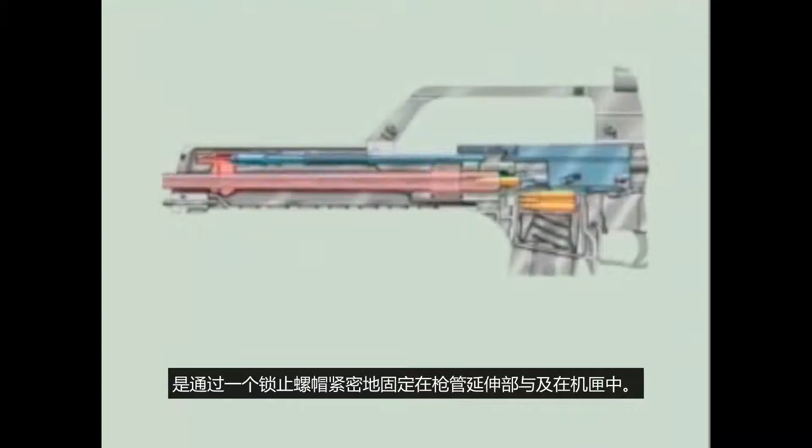The G36 rifle is an automatic weapon for firing semi-automatic or burst fire. The G36 has a gas-operated system with a rotary bolt head. The hammer-forged and hard chrome-plated barrel is firmly locked to the barrel extension and to the receiver by a locking nut.

Receiver, pistol grip, foldable buttstock and handguard are made of fiber-reinforced polymer. The magazine with its transparent receiver holds maximum 30 cartridges. The optical sight is integrated into the carrying handle.

The G36 is available in two versions, the G36E and the G36KE. The G36KE is provided with a shorter barrel and a shorter handguard. Handling, cleaning, disassembly and assembly are identical for both versions.

The cocking handle serves for loading the G36. It is used for moving the bolt in the receiver. The cocking handle permits operation by both left and right-handed shooters. The cocking handle can be swiveled outward and locked in position to be used as a forward assist. During firing, the cocking handle is parallel to the bolt and it moves with the bolt.

The bolt catch holds the bolt open after the last round has been fired from the magazine. When the magazine is removed, the bolt can also be manually held open by pulling it all the way to the rear and by pushing the bolt catch at the front of the trigger guard manually upward whilst releasing the bolt.

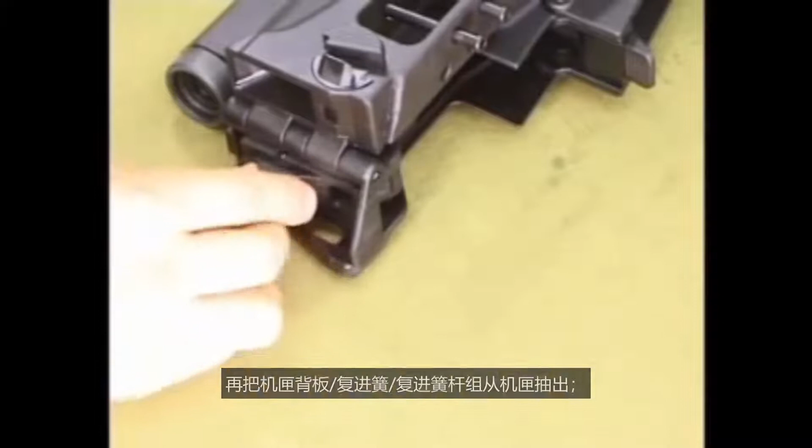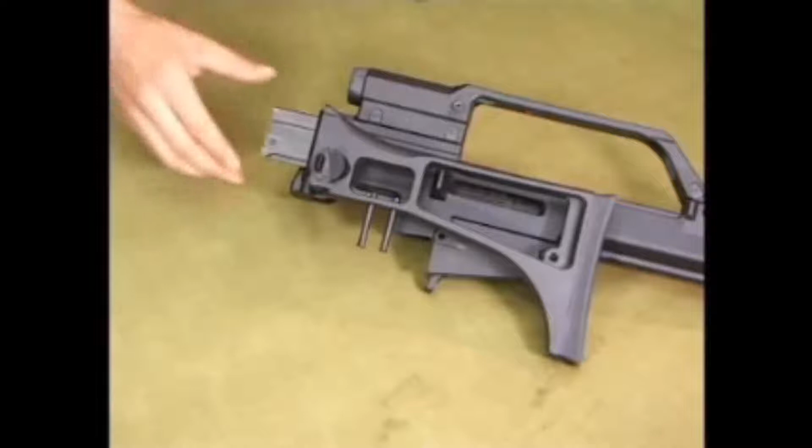For further disassembly, fold buttstock to the receiver. Push the backplate to the bottom and remove backplate and recoil spring guide rod with recoil spring. Remove the bolt. Press the magazine catch and remove the magazine guide to the bottom.

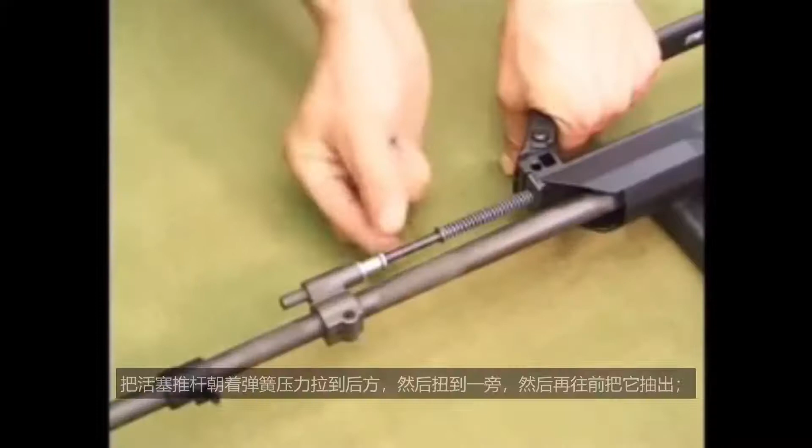Pull locking pin out of the handguard and insert it into the buttstock. Remove handguard to the front. Pull the push rod against spring pressure to the rear, pivot it aside and remove to the front. Remove the gas piston.

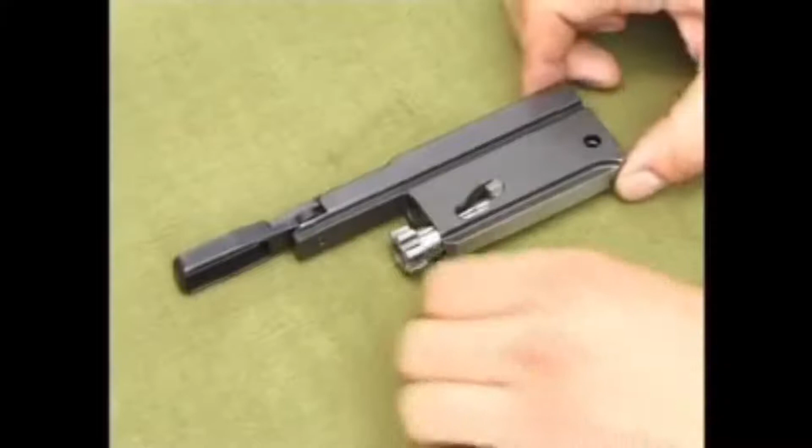Push out the safety pin in the bolt head carrier and remove the firing pin to the rear. Remove the control bolt to the side and take out the bolt head to the front.

For cleaning and care of the G36, use the pertaining cleaning kit. Competent carrying out of the cleaning and care operations ensures constant readiness to fire, prevents premature wear and tear, avoids accidents, and saves maintenance expenses and time.

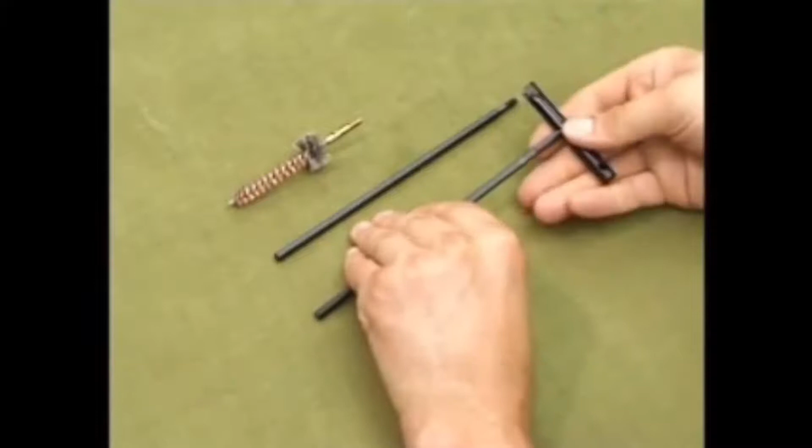For cleaning of the chamber, screw the chamber cleaning brush onto the cleaning rod. Clean the chamber of powder residues with a chamber cleaning brush soaked in oil.

Screw the barrel cleaning brush onto the completely assembled cleaning rod. Pull the barrel cleaning brush soaked in oil through the barrel. Cleaning is preferentially carried out immediately after firing when the barrel is still warm from firing. Let the oil react for some hours. Then pull the dry barrel cleaning brushes again through the barrel until the brushes remain clean.

Clean the gas piston, bolt parts and grip, as well as all the other metallic parts with a clean cloth, a cleaning brush and slightly oil. Clean the aiming optics with the optics cleaning cloth. Synthetic parts may be cleaned with water. In case of heavy fouling, soap may also be used for cleaning.

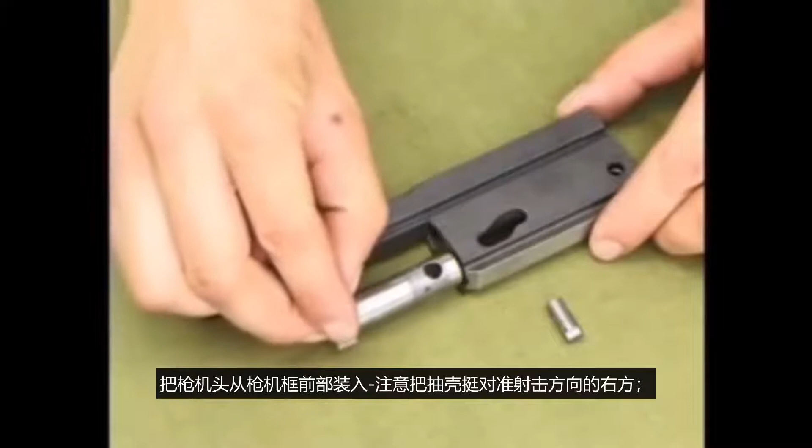Introduce the bolt head from the front into the bolt head carrier. Mind that the extractor points to the right in the firing direction. Place the control bolt with its control surfaces parallel to the firing direction into the bolt head and the bolt head carrier. Insert the firing pin from the rear into the bolt head carrier. Push in the safety pin until it is even with the side of the bolt head carrier.

Before assembling the G36, all disassembled parts must be cleaned, carefully dried, and the metallic parts must be slightly oiled. Also oil the bolt guide rails in the receiver. Insert the gas piston into the gas cylinder.

Introduce the push rod from the front into the receiver, push the rod against spring pressure to the rear and insert it into the rear of the gas piston. Slide the handguard from the front onto the receiver and push in the locking pin. Place the magazine well with its front extensions onto the attachment studs on the receiver. Swivel the well upward until the magazine catch engages.

Insert the bolt from the rear into the receiver. Insert the back plate with the recoil spring into the receiver. Introduce the bearing stud on top of the back plate into the hole at the top rear end of the receiver. Unfold and extend the buttstock.

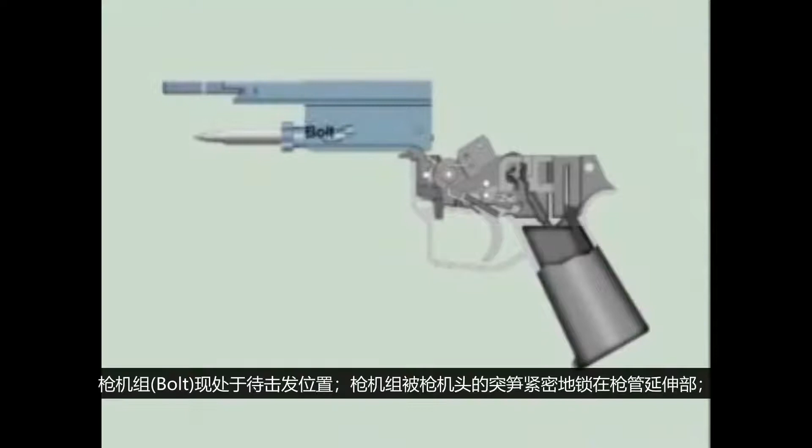The G36 in the initial position, cocked and set at safe. The bolt is in battery position. The bolt firmly locks with the locking lugs of the bolt head into the barrel extension.

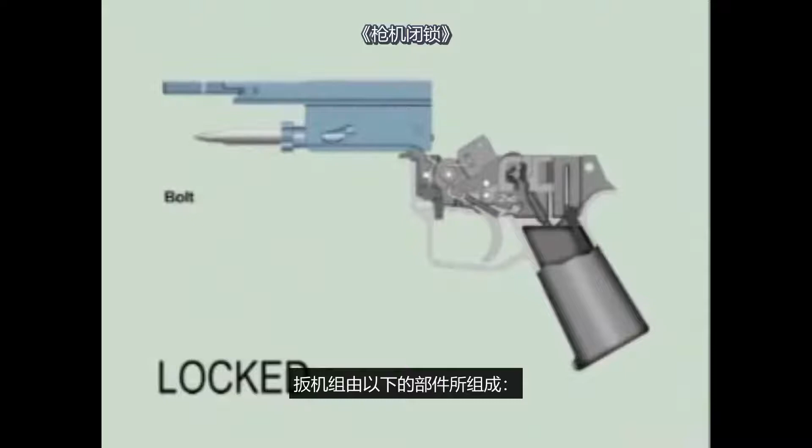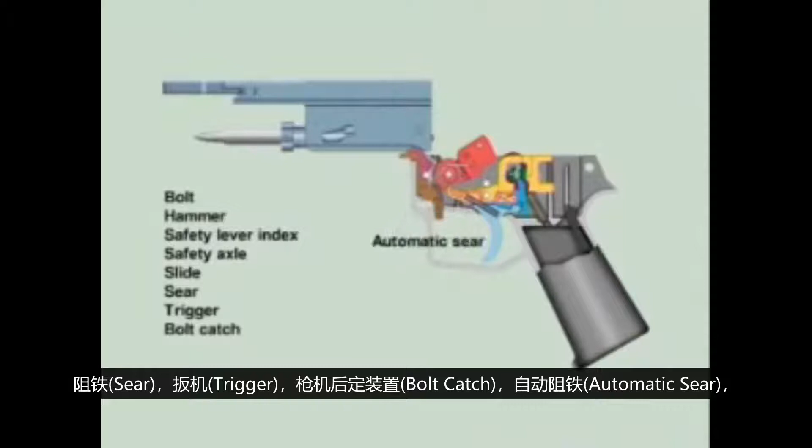The trigger group comprises the following assemblies: hammer, safety lever index, safety axle, slide, sear, trigger, bolt catch, automatic sear, hammer spring, sear spring. For unsetting the safety, place the safety fire selector lever at E.

The safety axle turns and allows the trigger to be pulled. When pulling the trigger, the front of the sear pivots downward and releases the hammer. The longitudinally movable sear is pushed all the way to the front by the sear spring. The hammer hits the firing pin and ignites the cartridge.

Upon acceleration of the bullet, parts of the propellant gases enter the gas port and push the gas piston and the push rod to the rear. During the rearward movement of the bolt head carrier, the bolt head is rotated via the control bolt and the control cam in the bolt head carrier. This rotary movement of the bolt head disengages the locking lugs and the bolt head separates from the barrel extension.

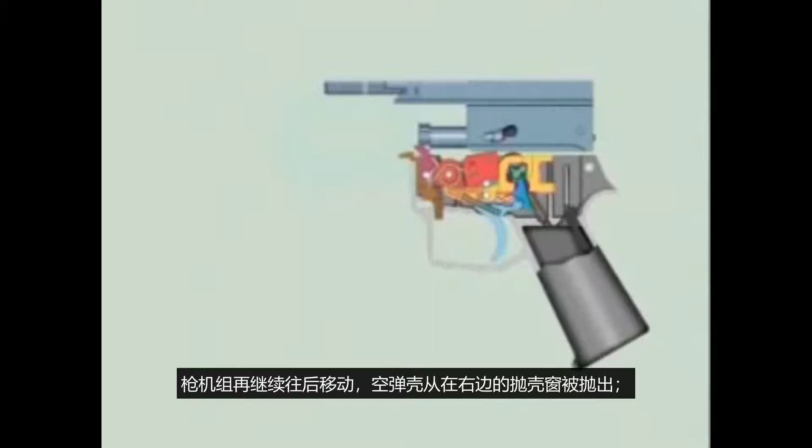The extractor in the bolt head extracts the empty case from the chamber. The rearward traveling bolt cocks the hammer. During the rearward travel of the bolt, the case is ejected to the right through the ejection port. In its rearmost position, the bolt hits the buffer in the backplate. The recoil spring returns the bolt to the front and the bolt head feeds the next cartridge from the magazine into the chamber.

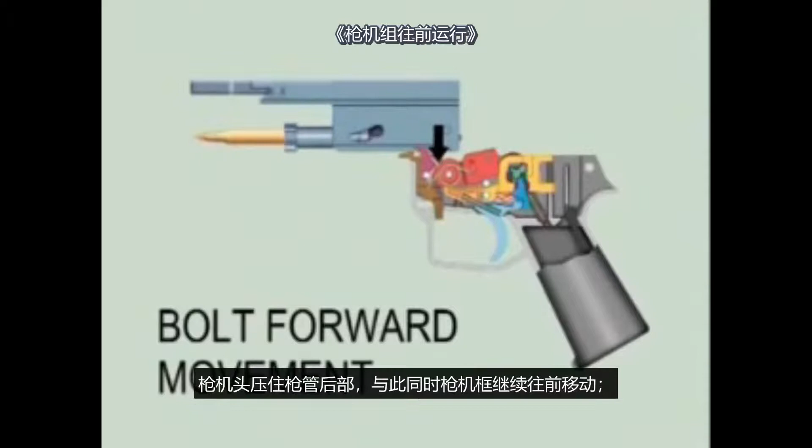The automatic sear engages into the hammer and catches the hammer. The bolt head abuts the rear of the barrel whilst the bolt head carrier pursues its forward movement. This rotates and locks the bolt in the barrel extension.

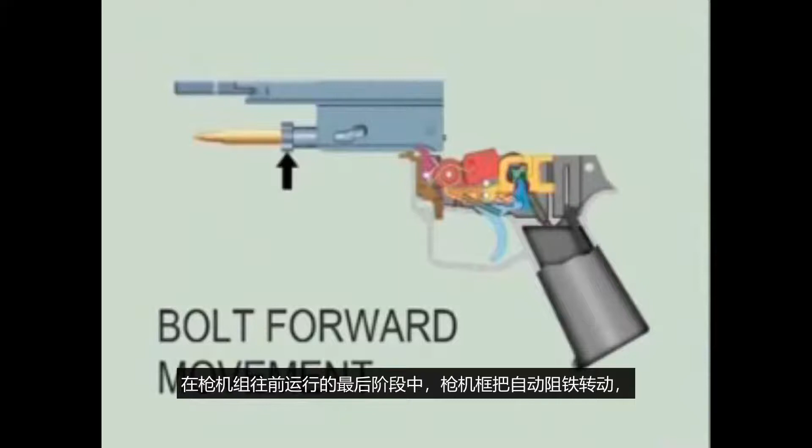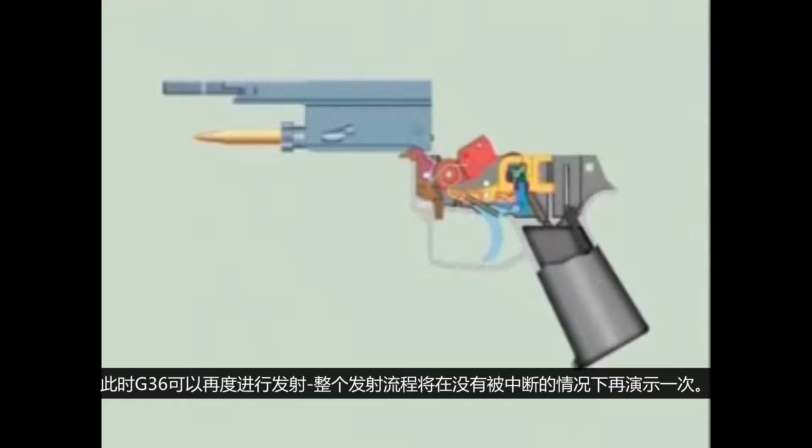In the final phase of the forward movement, the bolt head carrier pivots the automatic sear out of engagement with the hammer. The hammer is caught now by the sear, which is pushed to the rear. The G36 is ready to fire again. The complete sequence of operations is shown once more without interruptions.

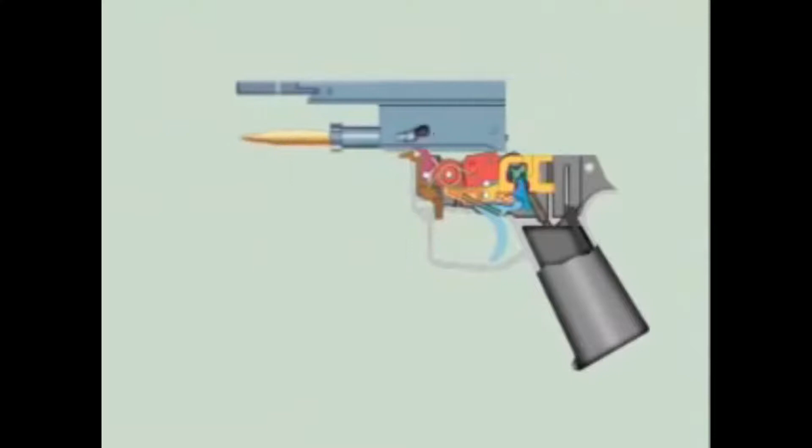The G36 aiming optics are integrated into the carrying handle. The optical sight is provided with a 3 times or optionally a 1.5 times magnification and a specifically designed reticle. The reticle is provided with range marks from 200 up to 800 meters in steps of 200 meters. The center of the reticle is used for ranges up to 200 meters.

The exterior diameter of the circular reticle serves as a lead mark for laterally moving targets at a range of 200 meters and a target speed of approximately 15 kilometers per hour. The interior diameter of the circular reticle corresponds to a man size of 1.75 meters at a 200 meters range.

The stadia pattern at the left corresponds to a man size of 1.75 meters at ranges of 200, 400, 600 and 800 meters and is used as a rangefinder. The heights of the vertical range mark lines for 600 and 800 meters also correspond to a man size of 1.75 meters at the respective ranges. The horizontal line across the central reticle is used as an aid against canting.